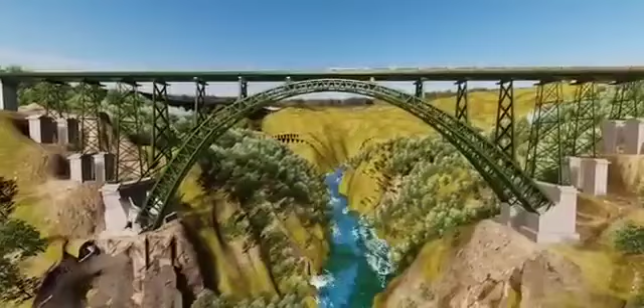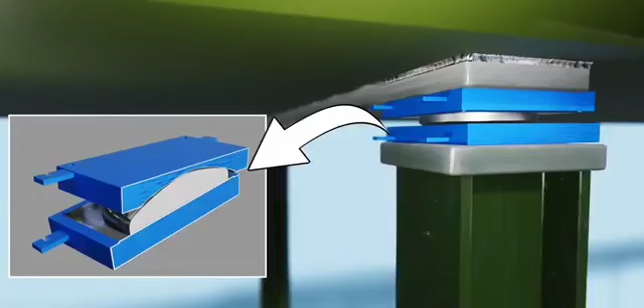Passengers might think that this would soon happen. What actually happens is different. The rail deck remains unaffected by the earthquake. Can you explain how this is possible? The answer lies in the spherical bearings. The lower part of each bearing moves with the ground, but this motion does not transfer to the upper part.

To isolate the rail deck, the Chenab Bridge also makes use of expansion joints. The way expansion joints work is a feast for the eyes. The movement of the box-shaped rubber structure makes this functioning possible.

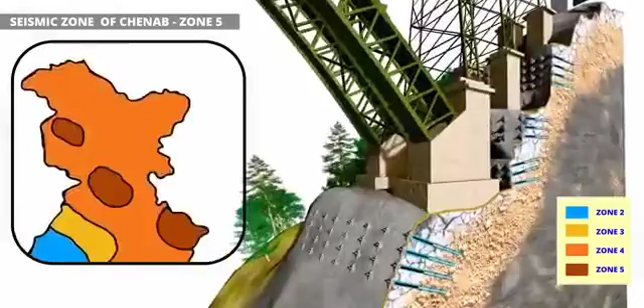To understand why this bridge is safe, even in a Seismic Zone 5 area, let's take a cross-section of its foundation. You can see a lot of interesting stuff here. This was the shape of the mountain before the construction work started here. An irregular, sloped mountain. The minimum slope of this mountain was 43 degrees, and the maximum was 77 degrees.

The first job of engineers is to cut these mountains so that the shape is suitable for construction. The rocks in these mountains are not so strong. It's a material called dolomite. Not suitable for erecting a strong foundation. Excavators were used in the initial stage of shape correction. After that, they employed a technique called presplitting.

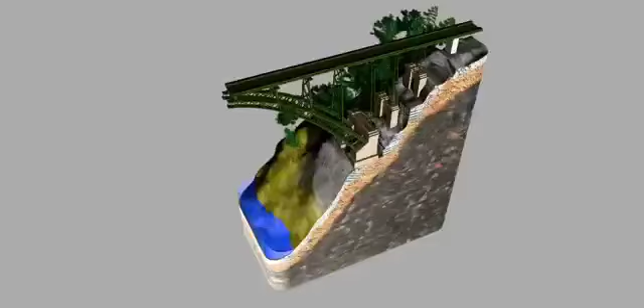In presplitting, a lot of tiny explosives are kept at a close distance. Connect them together and they explode. Normal explosives break unnecessary portions of a rock. Using presplitting, you'll have greater control over the rock to be broken. The mountains look more clean now, but how to make them stable? The engineers used 3 methods to stabilize the slope: grouting, the use of anchor blocks, and shotcrete.

The Himalayas are young mountains. The rocks in this region have a lot of minor cracks inside them. In the grouting technique, we inject cement into these voids. The cement acts as a glue and the rock becomes stronger.

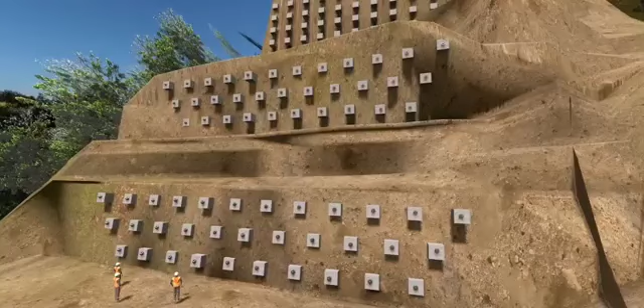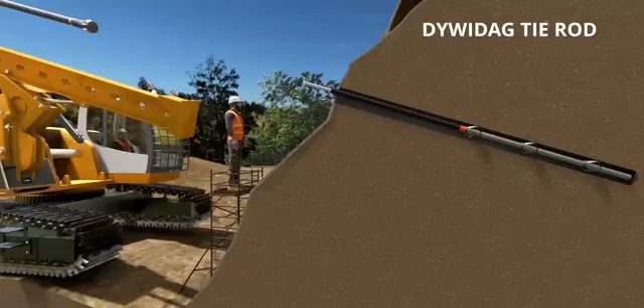You might have seen a lot of strange-looking blocks in construction photographs of Chenab Bridge. This is a smart slope stabilization technique called anchor block stabilization. In this method, the workers make holes on the slope. After that, they insert a special rod with a lot of tendons in it. In this project, they used Dywidag tie rods. Now it's time for grouting. Once the grout is hardened, a block is kept on the rod.

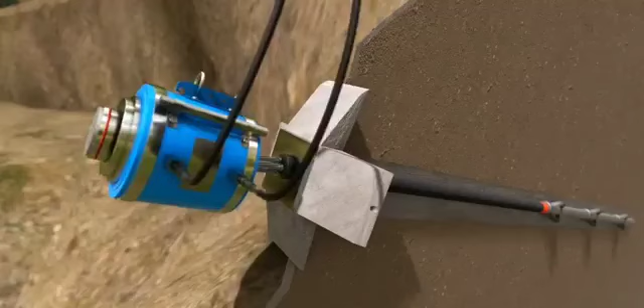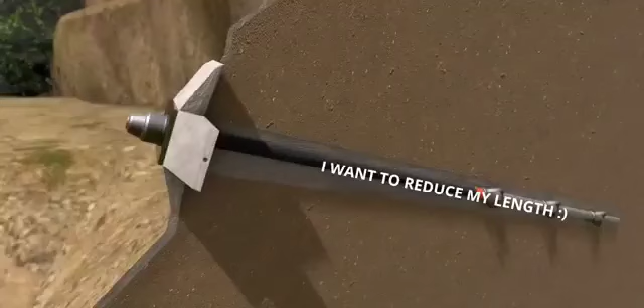Now comes the use of a powerful hydraulic jack. The hydraulic jack pulls and keeps the steel tendon in extreme tension. After that, using a wedge arrangement, the steel tendon is kept in tension, even if the hydraulic jack is removed. Now, can you predict the force produced by the concrete block? The steel tendon in tension wants to reduce its length, but the block is not allowing that. This means the concrete block will press the slope inward. This compressive force will greatly increase the stability of the slope.

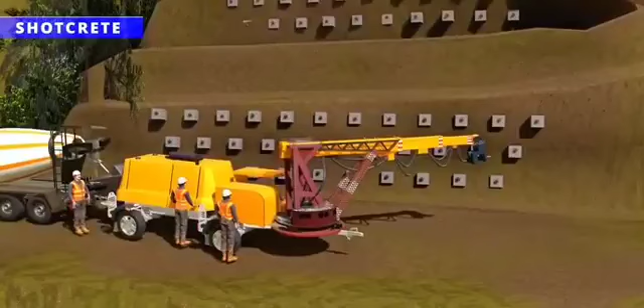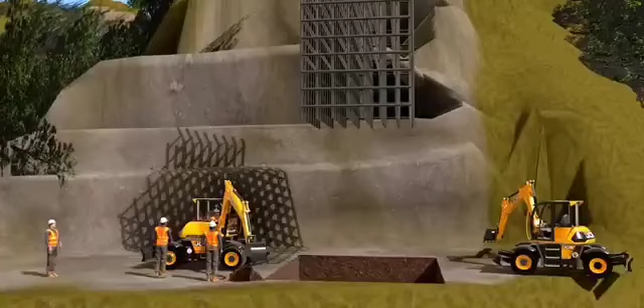Their next technique is shotcrete. Using this special machine, concrete is sprayed on the mountain rocks. This technique increases the stability of the mountain further. Now, the mountain is ready to support the heavy steel material. Next, they prepare the concrete foundation so that the steel piers of the bridge can be erected on it. Erection of the steel piers is done in a rather straightforward way.

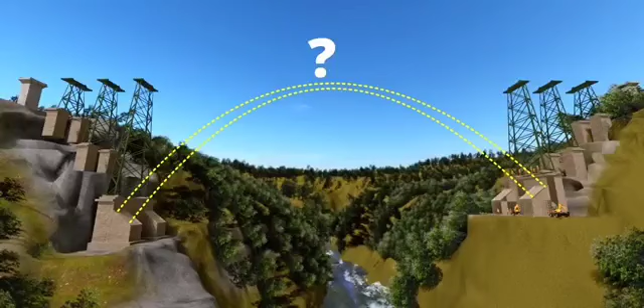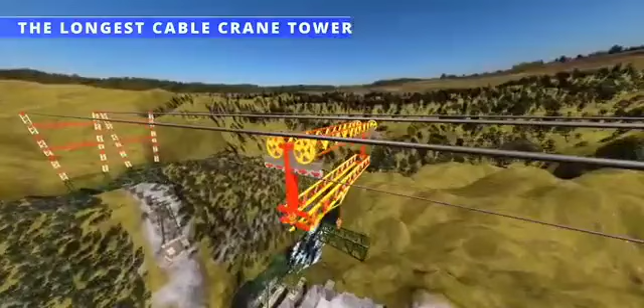But how to erect the arch? No crane in the world will be able to do this task. That's why the engineers first erected the longest cable crane tower in the world, with a span of 915 meters. This cable crane is capable of lifting up to 35 tons. All the structural elements needed for the bridge were transported via these cables.

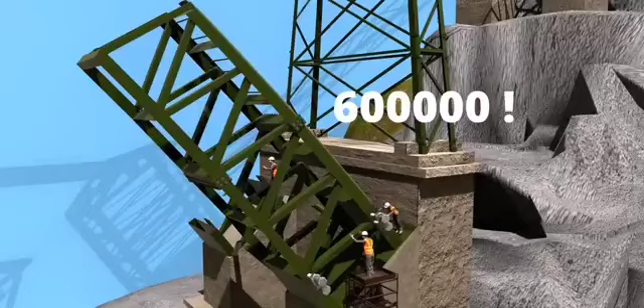Each arch segment is made up of box sections of 10 to 12 meters length. The different elements of the arch were connected together mainly using nuts and bolts. More than 600,000 nuts and bolts were required for this work. The arch construction is progressing in a step-by-step manner.

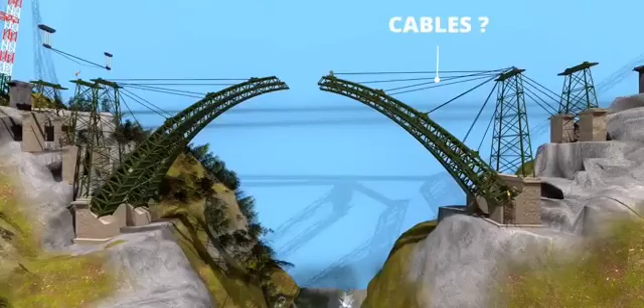During all these processes, you can see cable stays supporting both halves of the arches from the steel pier. Without these cables, you can guess what will happen to the arches. They'll fall down due to their own weight. More interestingly, to balance the force on the first main pier, the cable stays were connected to the neighboring pier in the opposite direction. Without these stay cables, the main piers would bend inward.

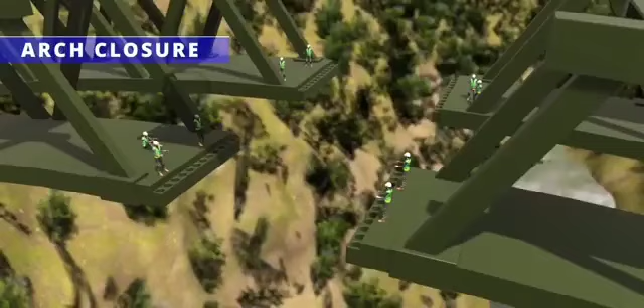Now comes the crucial day, the completion of the arch erection. Both halves of the arches met on this day. This process is known as arch closure. The main issue in arch closure is that even minor alignment issues can make the final connection an impossible task for the workers. Even if the alignment is perfect, the heavy wind will make the assembly work difficult.

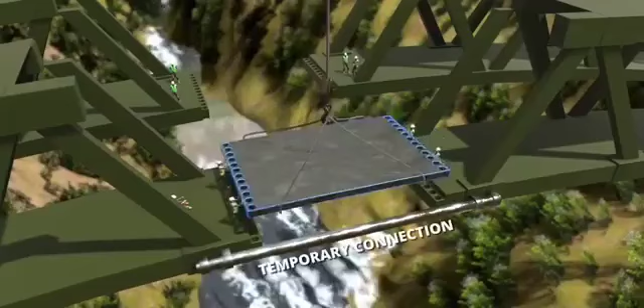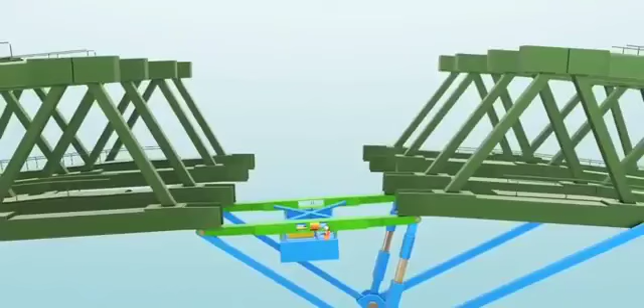So the first task before the structural element installation is to align both the halves perfectly, and also we need a temporary connection between them. This is why this special hydraulic jack is used. By adjusting the green member of the jack, the horizontal distance between the arches can be adjusted. You can see currently only 6 members are missing from the arch. The yellow portion helps in adjusting the vertical distance.

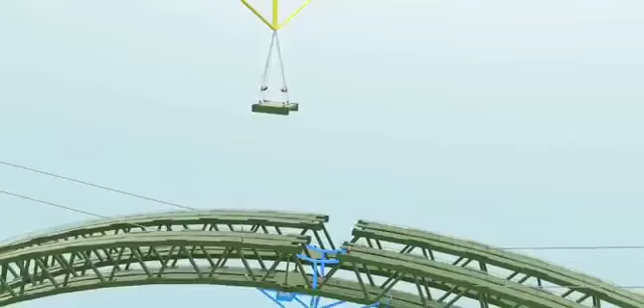The bottom chord can be fitted. Once this is done, the force in the green member of the jack can be released now, and a few more elements can be installed. Now they introduce the next jack. Until the perfect gap is achieved in the top chord, adjust this jack. Now, the top chord, the final structural element of the Chenab Bridge, is installed.

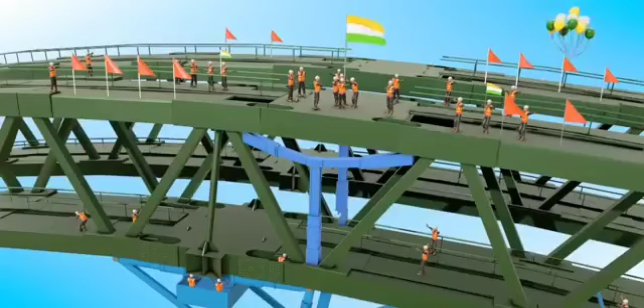This was a big celebration. Both arch halves got connected perfectly. The jacks have done their job. Once the arches are connected together, the support cables are no longer needed. The half arches support each other. They erected piers even above the arches. For the erection of the arch, the workers worked meticulously. Even their food was delivered by crane on the arch.

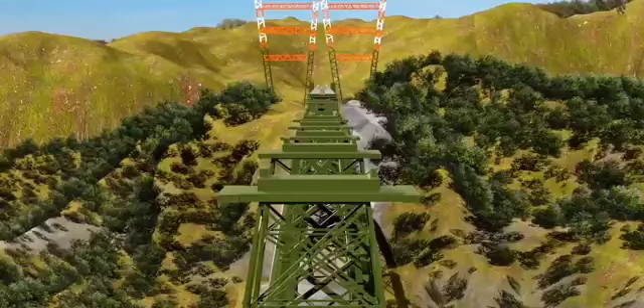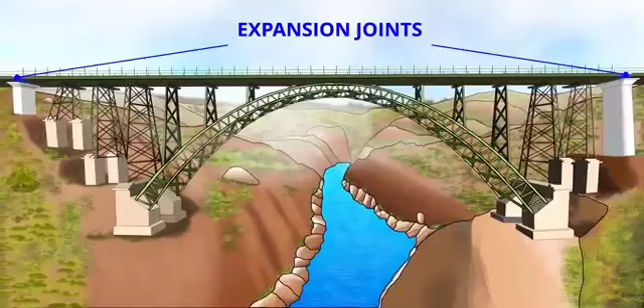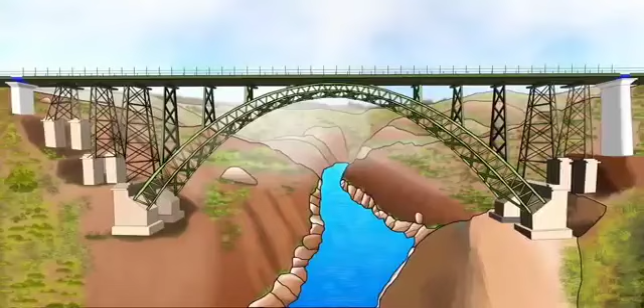The next stage of construction is the installation of decks. The rail track will be laid on this deck. We've already studied about the expansion joints of Chenab Bridge. The main span of Chenab Bridge uses 2 such expansion joints. The bridge is separated into 3 pieces with the help of these expansion joints. In short, the rail deck of the Chenab Bridge is not fixed to any structure from the ground. It's just floating on all these bearings.

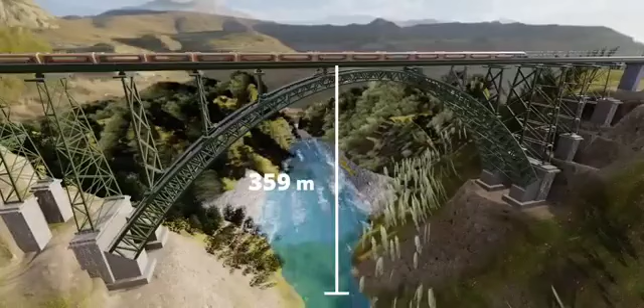All this sophisticated engineering, planning, and execution are the reason why the Chenab Bridge became the tallest rail bridge in the world. Its height is 359 meters above the Chenab River, 35 meters taller than the Eiffel Tower. You might have wondered why Chenab Bridge uses the arch bridge technology. Why not a simple pillar bridge? Look at the height of the pillars needed in this case. This would also obstruct the river flow below.

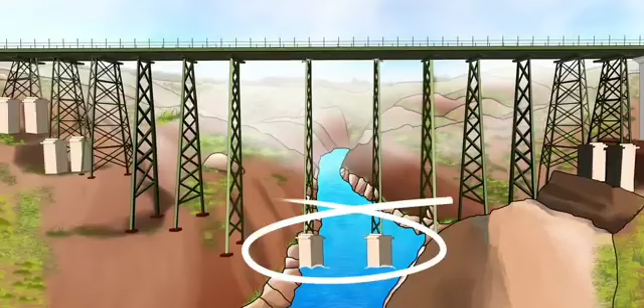Now it's time to prove logically why parabolic arch is the best self-supporting structure. Let's tie a gigantic chain across the mountains of the Chenab. Thank you, King Kong, for your help. The shape this chain forms is a catenary. However, for simplification, we can approximate this shape as a parabola. Even if you try to hold it in some other shape, it won't stay there. A chain can support only a normal tension force.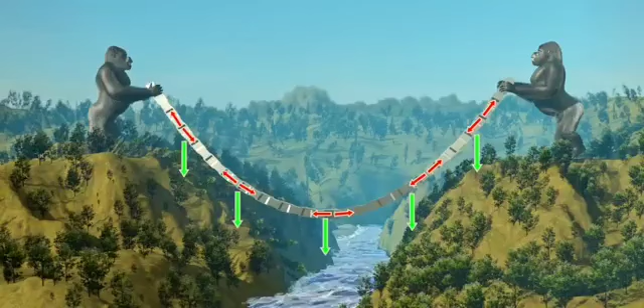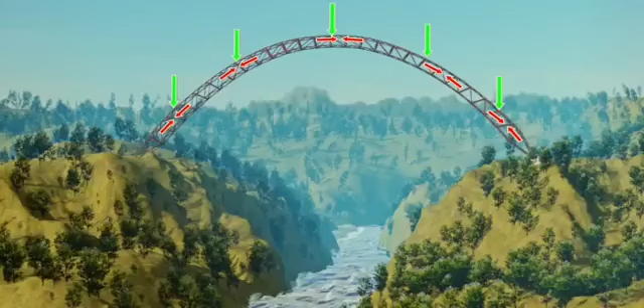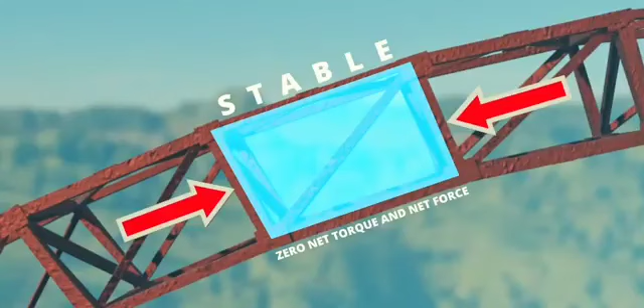Now the tricky part. Let's solidify this parabolic chain. Now let's flip the direction of the gravitational force. Since the external force has flipped its direction, the internal stress will also flip its direction and become purely compressive. Now just flip this entire arrangement. Wow! It becomes an exact arch bridge. The compressive force developed by this parabolic structure is exactly at the middle of the section. Such structures are always stable. You can see why a structure may not be stable when the forces do not have this quality. This is why the parabolic arch is the best self-supporting structure.

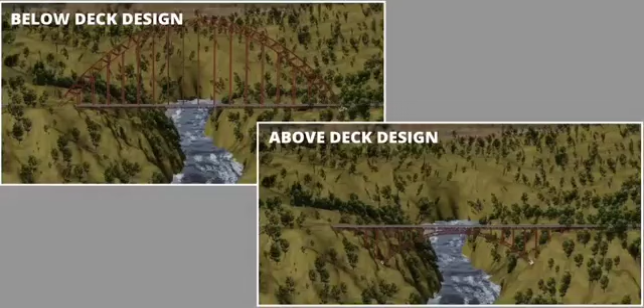Now let's construct a road deck below this arch. This arch bridge is unnecessarily huge. There's one more way to achieve the same objective. Just shift the supporting arch down. Here again, the force induced in the arch is the same. If you were the chief engineer in charge of this project, which design would you choose? Obviously, the above-deck design, right? The reason is simple. You will save a ton on construction materials.

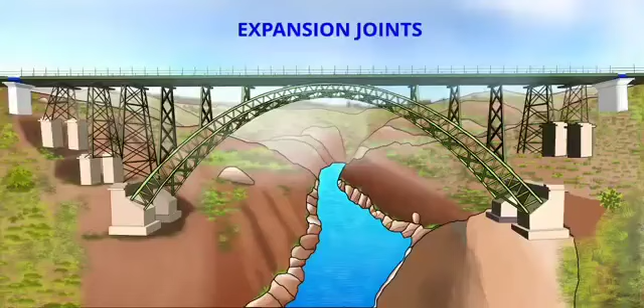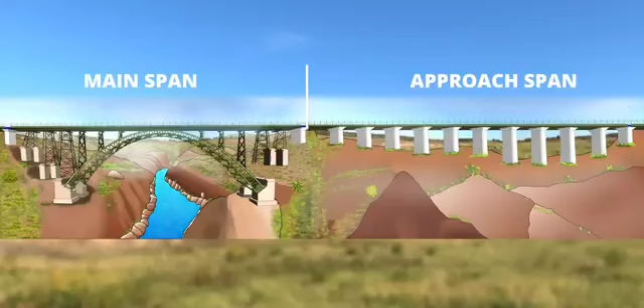So far, we've seen 2 expansion joints of Chenab Bridge. It should be noted that the bridge has one more expansion joint, but slightly away from the arch section. In short, the 3 expansion joints separate the bridge into 4 pieces. The bridge is even designed for redundancy. This means even if one of its piers gets damaged, the bridge will still remain stable. The train will still be able to cross the bridge, but at a maximum speed of 30 kilometers per hour.

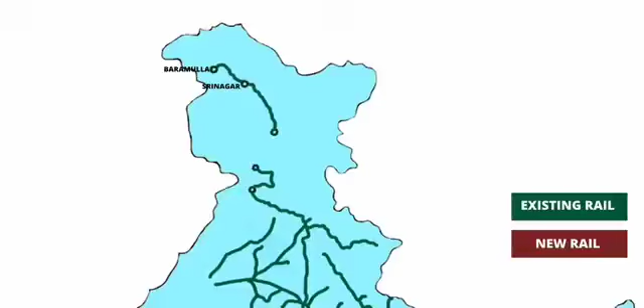Chenab Bridge is connecting the Kashmir Valley to the rest of India via rail link for the first time. Huge mountains, weak rock, inaccessible terrain, heavy wind, and earthquake-prone area. Chenab Bridge project overcame all these hurdles and became the tallest rail bridge in the world.